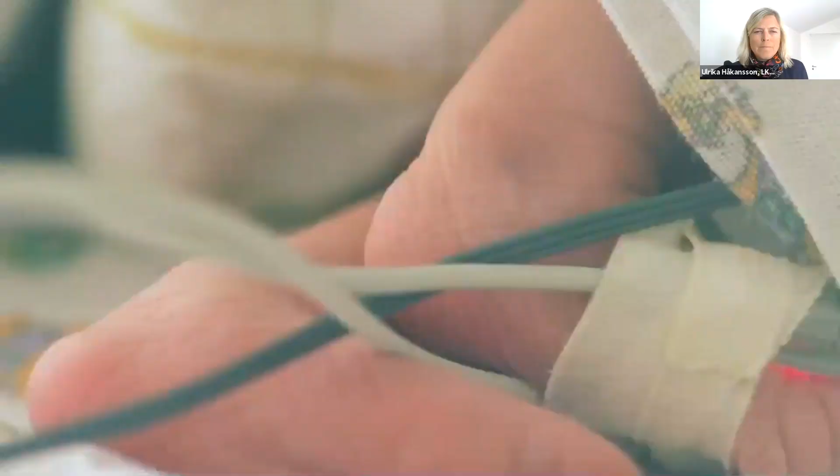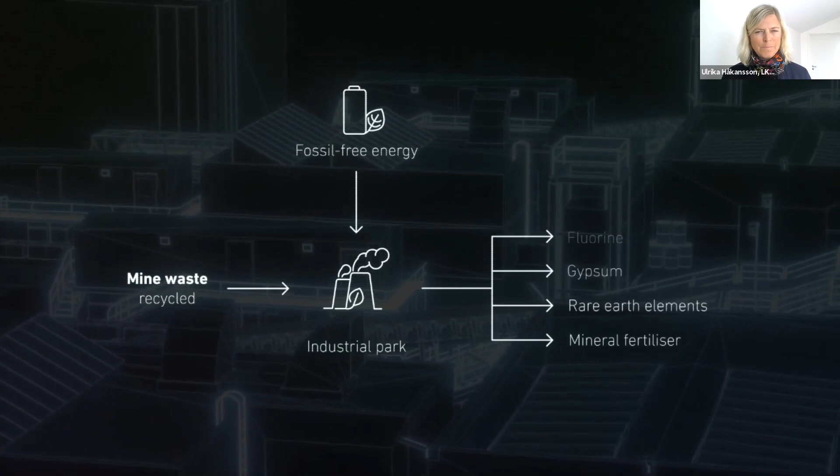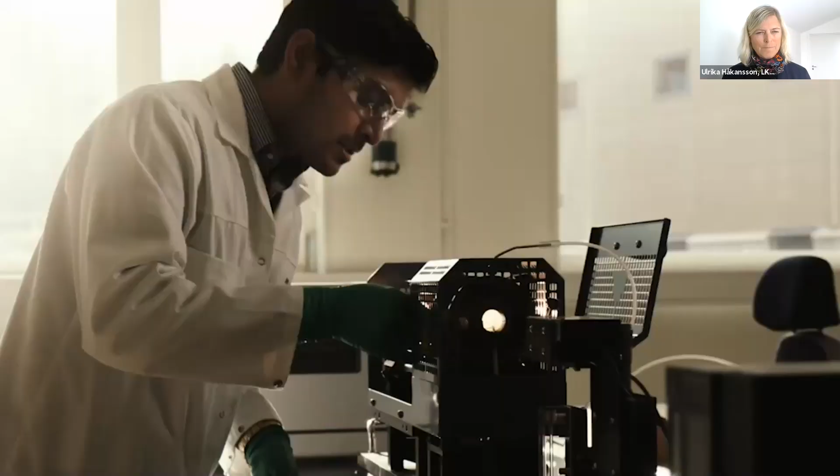In our everyday life, minerals are all around us. Some we're hardly even aware of, like fluorine in small medical applications, or neodymium in magnets for electrical vehicles or wind turbines. With a growing population, the demand for minerals is higher than ever. At LKAB, we have accepted this challenge. These critical raw materials that we need come from down here. Through new technology in the REMAP project, we aim to prove that mining waste can become an important asset to the world's needs, without emitting unnecessary carbon dioxide. By establishing a large-scale industrial park and using innovative technology, we will extract valuable resources from the tailings sand: rare earth elements, gypsum, fluorine, and perhaps most importantly, phosphorus. Without it, global agricultural production would be halved. All of this will be produced with fossil-free energy, such as hydro and wind energy, something we have in abundance up here in the north of Sweden. We can't single-handedly solve the world's need for critical raw materials, but this will certainly make a very important contribution. LKAB already operates some of the most climate-efficient mines on the planet. But now we're starting yet another ambitious journey to turn today's waste into tomorrow's resources.

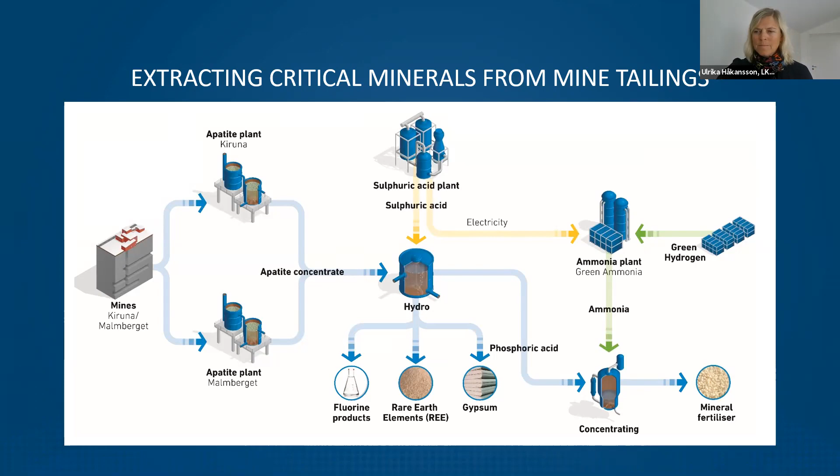We are in a pre-study phase, so we're working a lot with piloting to verify the processes. We have done most of it, and we're going to have our pre-feasibility studies, as we call them, by the end of this year, so we can make a good decision on how to move forward with the basic engineering and taking a board decision. So that's where we are right now.

We have also done a lot of exploration, so we know that we have the phosphorus source with us for the whole lifetime of the project, and LKAB has done a lot of work there. We know that until 2060 we will still have it in our fresh tailings. Apart from that, we have a source in our tailing dams, but in this project we haven't taken care of the tailings dams yet. That's to come in the next phase, when we hopefully succeed with implementing this project. So we do have a large source with us in LKAB.

Our main focus, of course, is on process development for the hydro plant. That's where we make the difference from the state of the art, by extracting all the products and not only the fertilizer.

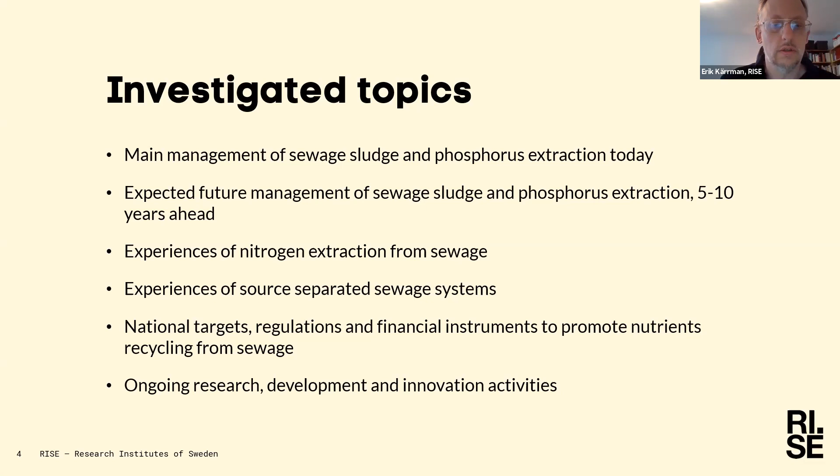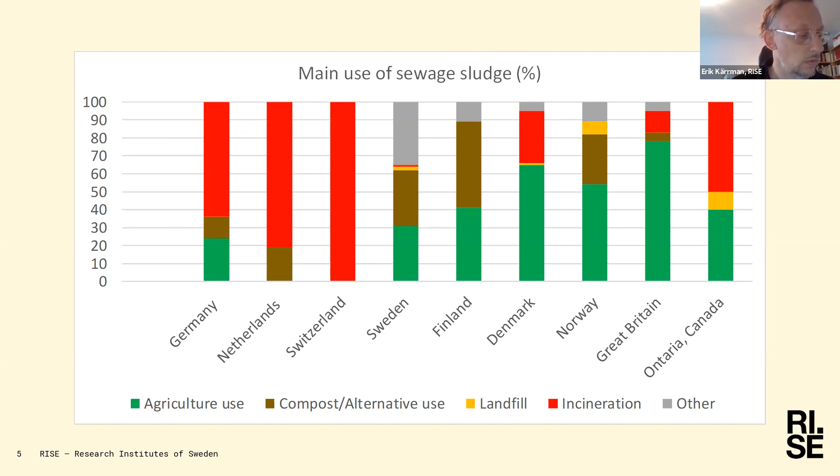What we did was try to categorize these countries a little bit to talk about them in groups. So we called them the legislation category - Germany and Switzerland, the investigation category - Sweden and Finland, and the threshold limit value category, which are the remaining countries.

What was typical for the legislation category was that they have a ban for use of sewage sludge in agriculture - in Switzerland since 2006. In Germany, there are strong regulations since 2018, where they should have a very clean phosphorus recycling plan. There's a limit regarding the size of the treatment plant - from 50,000 and bigger, where we have very strong regulations for this.

So it's very much a domination of incineration here, but they have quite large ambitions and are also starting some activities to recycle phosphorus in these countries from the ashes.

Then we have the investigation category, typically Sweden and Finland, who come from a situation where we have used sewage sludge in other ways. There's a quite large debate, for instance, in Sweden, about how to go further on. We had this inquiry which was actually supposed to suggest legislation to ban sewage sludge on farmland, but they also presented another opinion with other types of recycling of nutrients.

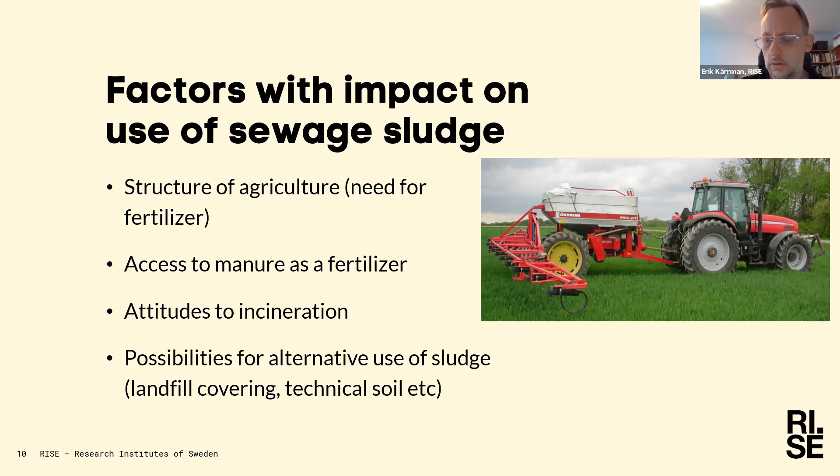We also looked at nutrient extraction in wastewater treatment plants. It's a lot of things going on, but not at a full-scale perspective. There is both struvite production used, applied in different wastewater treatment plants, and also nitrogen recycling, but it's a little bit marginal, I would say.

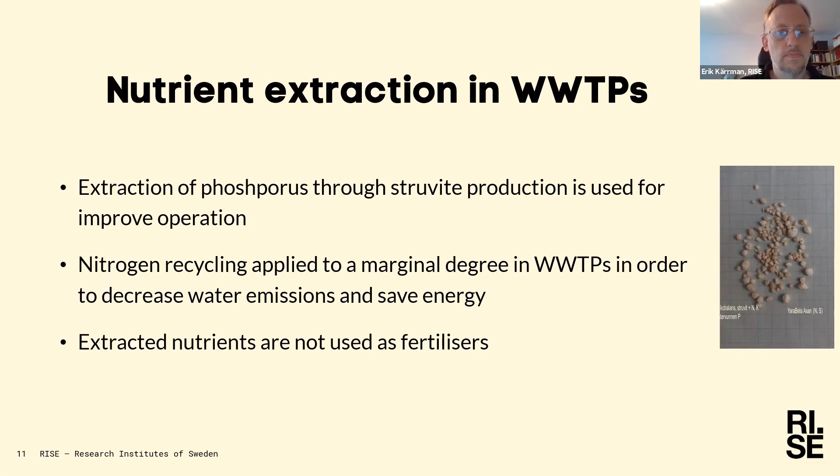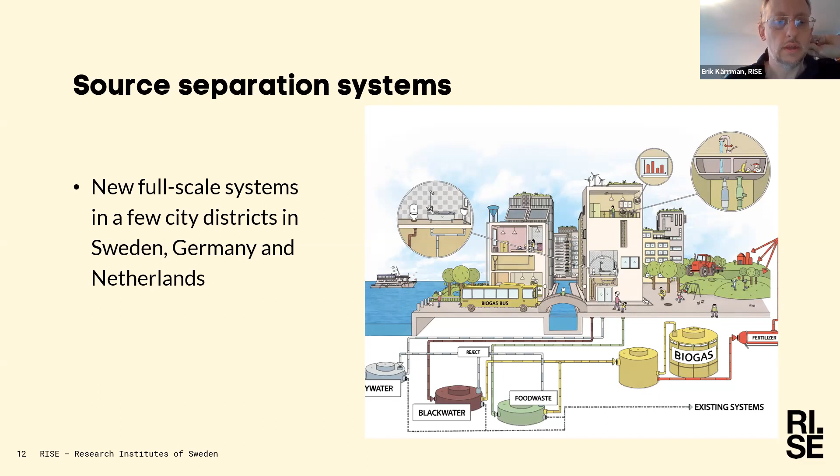We also looked at source separation systems, and it's very interesting to see that in Sweden, Germany, and Netherlands there are quite new built areas - here is an image from Helsingborg, Sweden. We will get a lot of new information about this soon, since these are newly built, which is very interesting. But it's of course a marginal thing looking at the whole of Europe - only districts in a couple of cities.

So what we found in this study, more or less to summarize, was that the movement towards incineration of sewage sludge, with possible extraction of phosphorus and possible use in agriculture, is something that is growing in parts of Europe. But at the same time, we have a more or less unchanged use of sewage sludge in other parts of Europe, and they seem not interested in changing this.

We have a lot of interesting ongoing research, pilot studies, and full scales in different ways of recycling nutrients, source separation systems as well, which will be interesting to see the outcome of. But we also see that there's a lack of business models for the circulation of nutrients from sewage to agriculture, so there is a lot of work needed there if we would like a cycle.

I think I will stop there. Thank you very much.

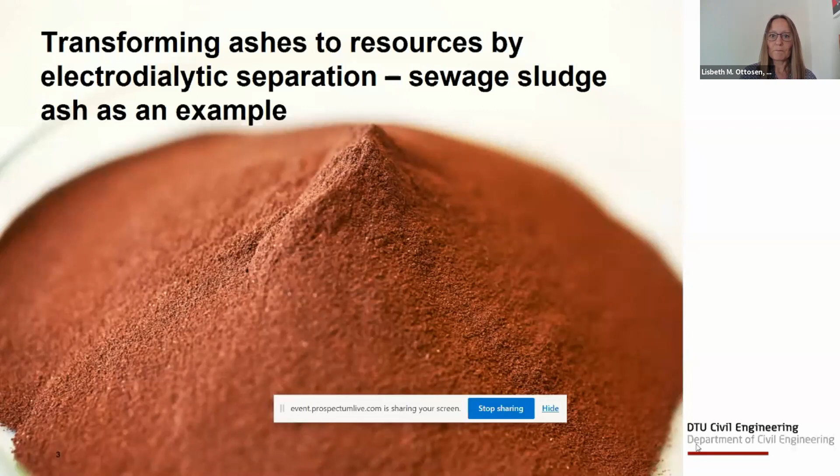And here it is, sewage sludge ash as an example. The overall idea is that we take the sewage sludge, and as we just heard in the previous presentation, we incinerate quite a lot of it in Denmark, and in some countries, all of it. In other countries, like Sweden, none of it, but it might come, you never know.

And we get energy out of incinerating it. We have two very modern plants in Denmark where they actually gain energy even from incinerating such wet products. And then they also get the sewage sludge ash out of it, and it is what you see here, the red powder, that is sewage sludge ash.

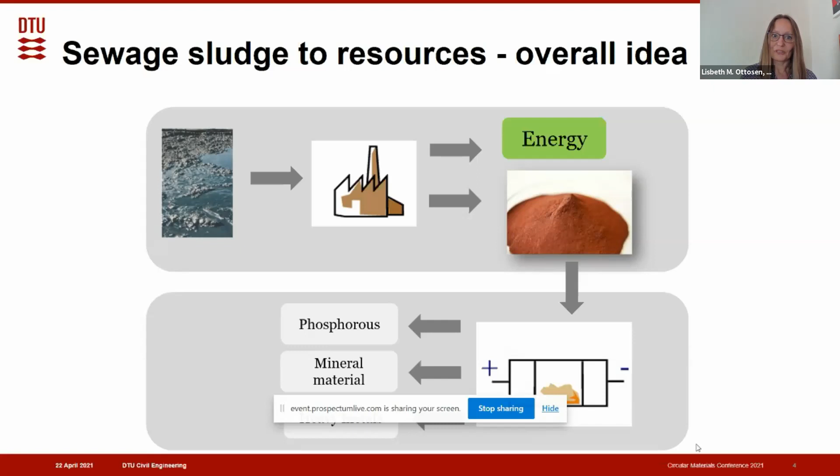Today it is mono-deposited or sent elsewhere, or there are other plans for it, but it is right now just not being really recovered. So what we suggest is that we take a look at this. There is a lot of phosphorus in it. There is a mineral material, which could also be a resource, and then we have heavy metals, which we learned yesterday, for example, copper is a really critical raw material.

So in such sewage sludge ash, as you can see some of the major components here: it's quartz, then we have hematite, that's why it has this nice red color. Then we have whitlockite, which is a phosphorus product, and there's also some calcium carbonates.

Below here, you can see I put some concentrations. It is in these ashes that I've been working with and show you results from. We have quite high phosphorus concentration - you can see up to 10% can actually be phosphorus in these ashes. So we are talking about grams per kilogram here.

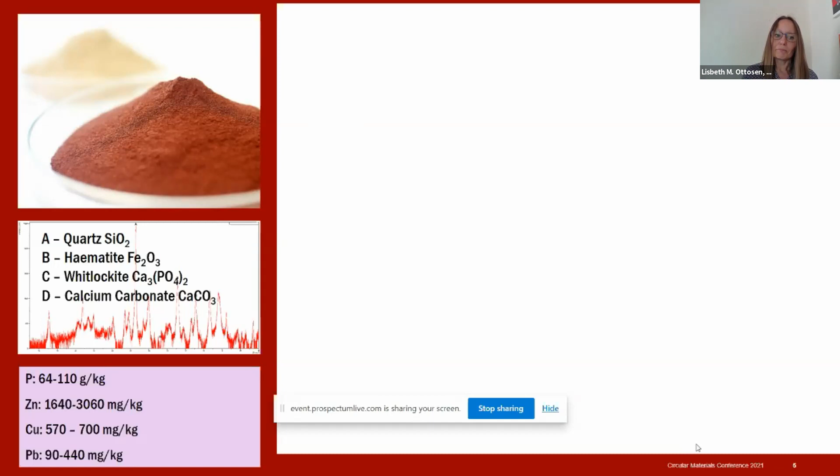And then I also listed three heavy metals: zinc, copper, and lead. You should notice here that these are in milligrams per kilogram, so there's really a scale difference in the concentrations between these two. But with this high concentration, we could, or we should, possibly mine the phosphorus out of this sewage sludge ash.

You can extract the phosphorus in acid. That is what I show here. I've had different concentrations of acids, getting higher and higher concentration, lower and lower pH to the left here.

And then I have shown here how much I've solubilized of these elements: phosphorus in black, and then copper, zinc, and lead. As you can see, if you go low enough in pH, here it was about 1, then you have almost all phosphorus extracted.

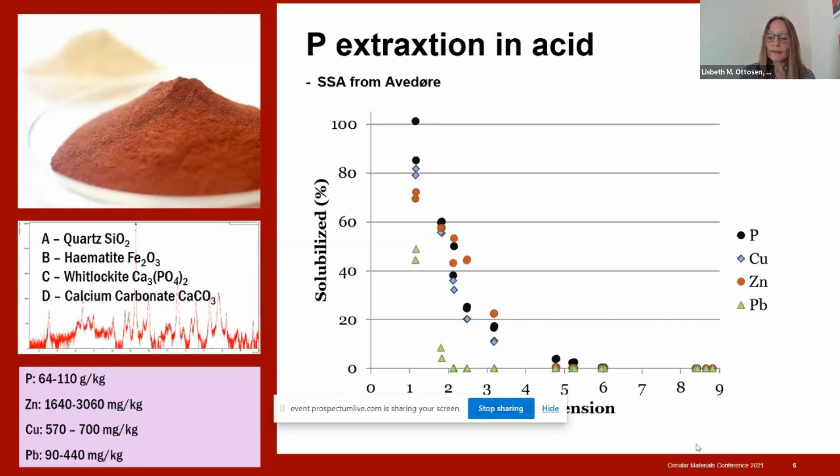But what you also see is that you will also extract the copper, zinc, and lead at the same time, at the same pH. It's unavoidable if you do it like this acid extraction, and therefore you need a separation step afterwards. What we suggest instead is to do it simultaneously.

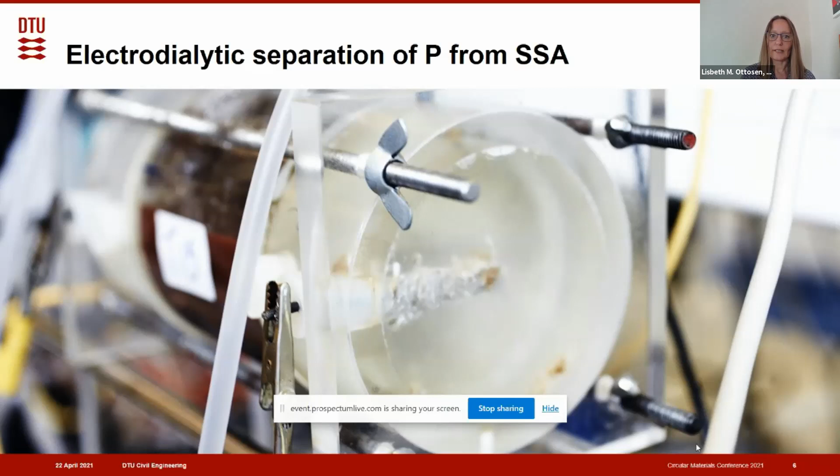You can do that, simultaneous extraction and separation, if you apply an electric field, using an electrodialytic method, like I'm going to show you here. Not that many details - you're much welcome to ask me about details later, but due to this short time, you just get the fast version.

You must imagine here in this compartment, I have two compartments, as you see. In this compartment here, I suspend the sewage sludge ash in water.

Then I have another compartment here. I place the cathode in the other compartment, that is the negative electrode, and over here it's a positive electrode, the anode, that is placed.

And then I have something here which is called a cation exchange membrane, and it's a membrane that only allows positive ions to pass. And when I then apply my electric field here, from the electrode process at the anode, I will have acidification. So that means that my acid is produced by electricity directly into the suspension.

While it's acidifying, we will have a release of heavy metals, which are in the electric field transported into the cathode compartment. And then the phosphorus, as it is negatively charged or in uncharged complexes, it will stay in solution here in the suspension of the ash. So this is the separation. We have the phosphorus here in the suspension, in the liquid phase, and then we get the heavy metals out here.

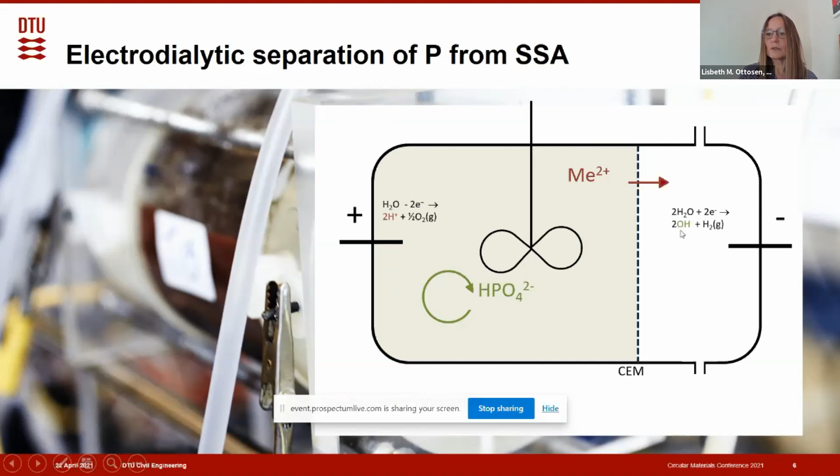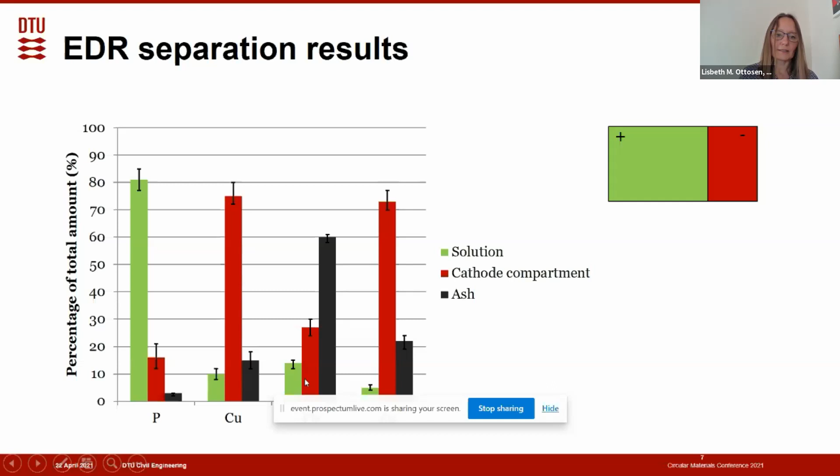What you should also remember was that I talked about grams per kilogram for phosphorus and milligrams per kilogram for heavy metals. So it's not like we have almost as much - it's not that 10% of the weight of the phosphorus was the same as we had, for example, for lead and the heavy metals. There's much less heavy metals than we had phosphorus in this suspension.

So let's now take a look at the different things that we have separated the sewage sludge ash into. And first we can look at the suspension where we have the phosphorus.

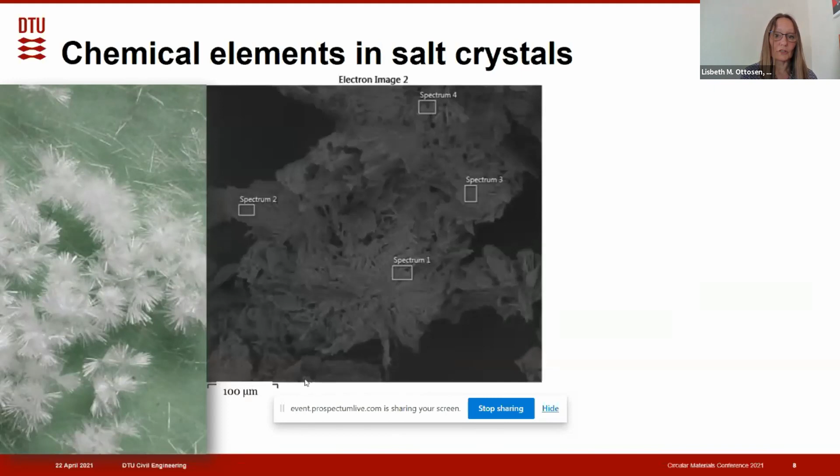So these crystals were, you could say, the product. This is the concentrate of what we could get, the most concentrated fraction we could get out of this solution. And we went to the SEM to see what's actually there and took some spot analysis.

And most of it is like we wished for. It's phosphorus, there's a little aluminum, there's a little of iron, and then there's also calcium in it. So it is a mixture of calcium phosphate and phosphoric acid that we have here. And these are very good products to continue with in the industry.

Calcium phosphates are soluble, so you can easily get your phosphorus out. Maybe it's not the right way to concentrate your phosphorus to evaporate the water, but this is a way you can do it.

And then, as I said, I wanted to know what is the cadmium concentration related to the phosphorus concentration. And as you can see here, it's really low - it was 3.7 milligrams of cadmium per kilogram of phosphorus in these crystals here. And it is very low compared to commercial fertilizers.

For example, in Europe these have an average of 138 milligrams per kilogram of phosphorus. And the concentration we obtained was actually at the very low end - I think maybe it was at the lowest end of what I could find in literature on commercial fertilizer. So it is a very clean product that we have produced here, a clean phosphorus product.

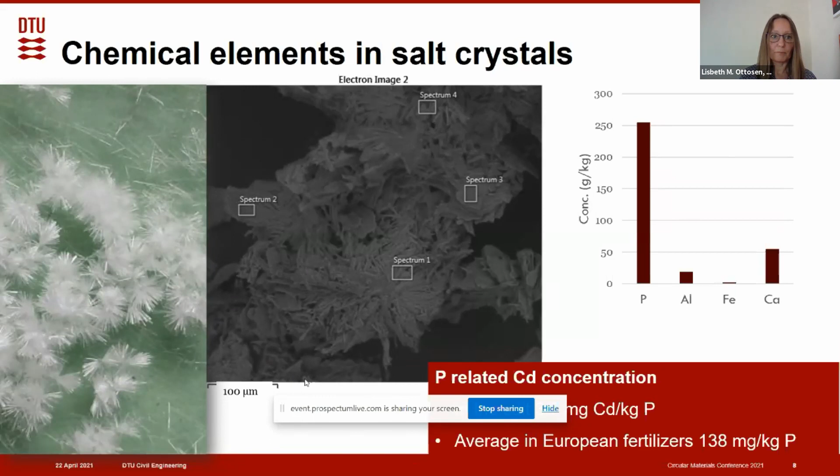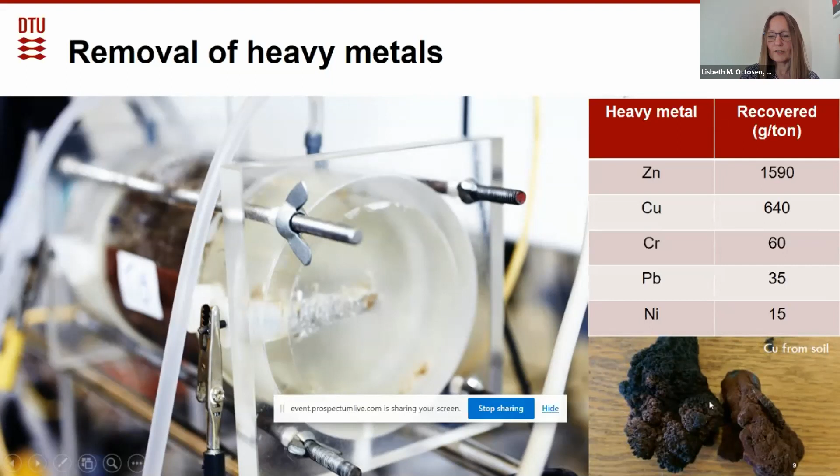And if you're very smart and bright, you can actually use this electroprecipitation to get products like this - this is pure copper, 98% pure. It is not extracted from ashes, I should admit immediately, that's why I put it here - it's something I've actually extracted from polluted soil. But this is the idea, this is what we'd like very much to do with the heavy metals: have them as pure resources which can be used directly in industry again. We're not there yet for the ashes or sewage sludge ashes, but it can be done, as shown here by examples from polluted soil. There's almost half a kilo of copper here, so it's not just a small sample.

But we still have something left - we still actually have an ash. It's still very red because iron oxides are not very soluble in acids. About 50% of the mass is left after I've extracted the phosphorus and the heavy metals, as you saw. So we asked ourselves - and as I said in the beginning, I'm from the Department of Civil Engineering - that was a question we could answer ourselves.

Could this actually be a possible resource in construction materials? Therefore we tried to cast - I had a PhD student working on this - we tried to cast concrete with this ash as a cement replacement. That's a good story, because cement production gives very high CO2 emissions - actually 5 to 8% of the anthropogenic release of CO2 to the atmosphere is due to cement production. So can we reduce this by using other things like sewage sludge ash? We're really on the good environmental side.

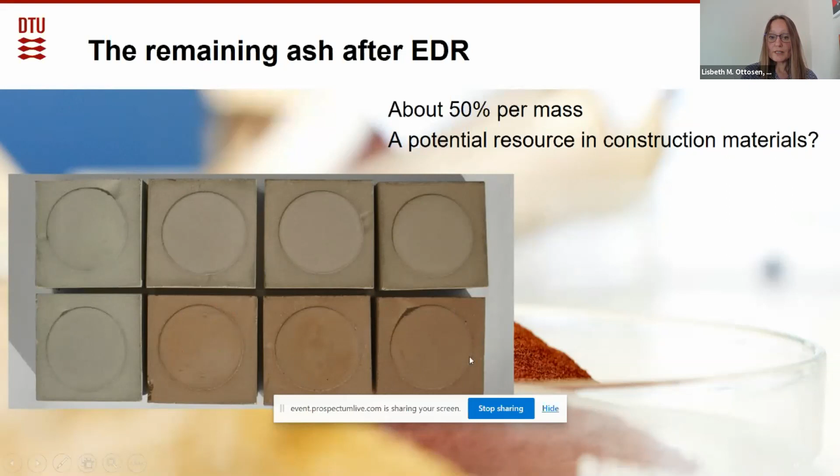What I show here is concrete without any type of ash - normal plain concrete. Then when I mix in my sewage sludge ash, which is treated, I get nice colors on the lower row. If it's not treated, you get the colors up here - it cannot be used directly, it needs to be milled, processed in some way. But when it's milled, you get a nice color, and you can actually replace 20% of the cement without losing strength of the concrete. So this could be a very good solution for this treated ash.

It could also be used in bricks. Here in Denmark, we have a lot of brick houses - we like very much to live in red houses. I do not, I live in a yellow house, but most people will like the red houses. Actually, the clay you incinerate to fire and get red bricks is a scarce resource - you get yellow bricks in the brickworks right now. But if you mix in a bit - here 30% of the clay is replaced with sewage sludge ash - you get a nice red color again, and it also had good qualities, these brick pellets I made here. So that could also be a use for the mineral fraction after extraction of the elemental resources.

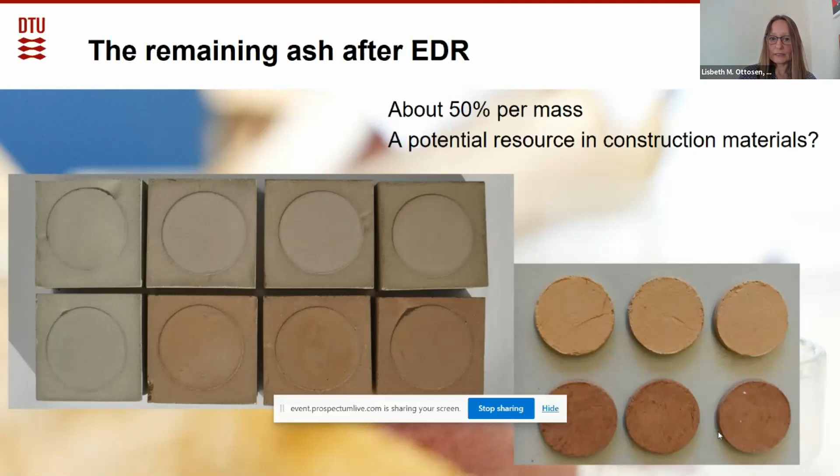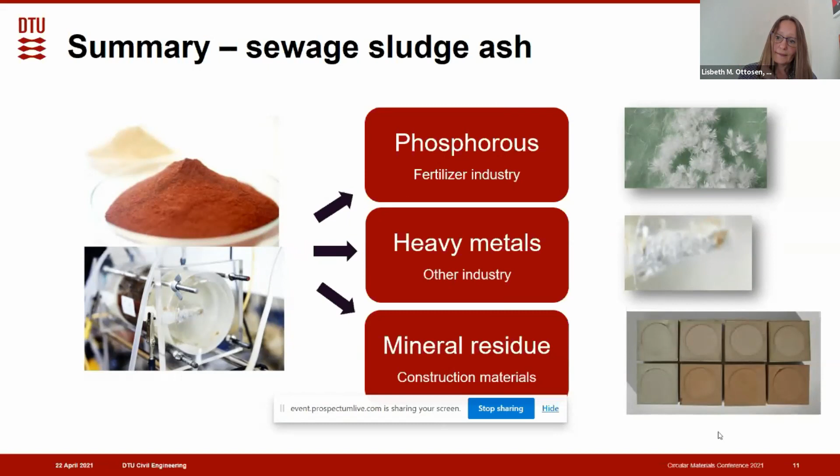And then the mineral residue could go to the construction materials, and then there's very little left which is not recirculated. The little which is left could be mercury and cadmium, for example, which we simply need to get out. But it would also be a very high benefit to get these out of the cycles and deposit it in the most safe way. So all resources that could be used are used by this process.

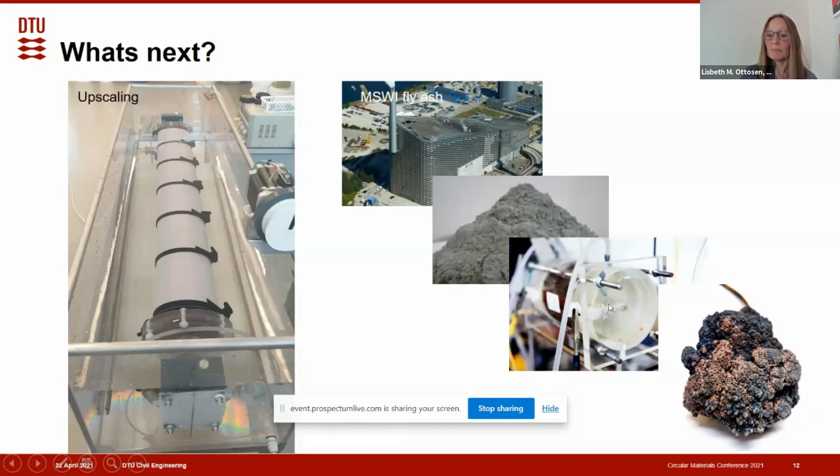So this was all from me. Thank you very much for your attention, and sorry for the troubles in the beginning of my presentation. If you have any questions, just send me an email.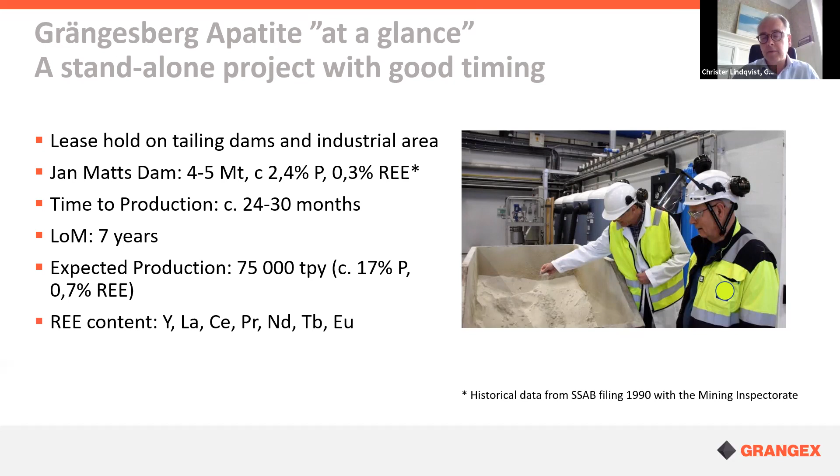But anyway, we are located in Grängesberg, as I mentioned, focusing on the Jan Matts dam southwest of the village of Grängesberg. Grängesberg is more familiar to you all, I guess, due to the Spendrups beer, and that's fine, it's tasty and good. But we are focusing on the tailings here.

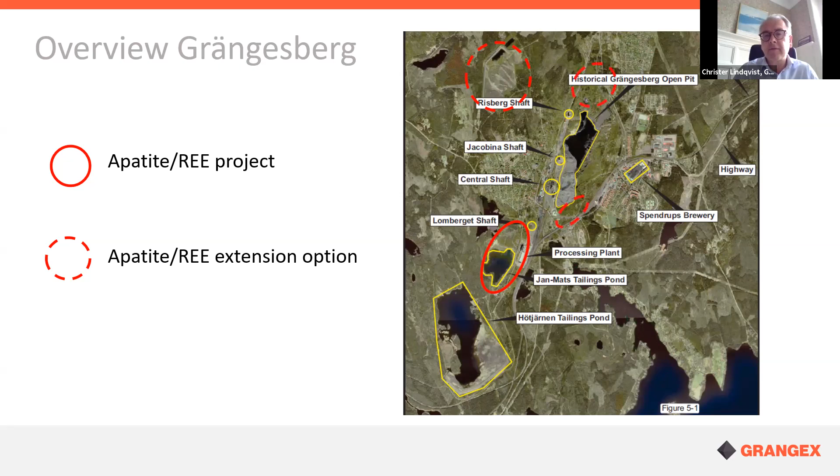And this is the site we are starting with. We have also expansion opportunities once we have exhausted the extraction from the Jan Matts dam. And there are three more sites around the Grängesberg village.

The dam as such has been in operation from the 1950s up to 1973, when it was closed. Thereafter, Grängesberg Iron Mine Company started to extract the apatite as a byproduct from the iron ore making at the time, all the way up to 1989. So this is the last big dam with phosphorus in it, but it's enough to start with.

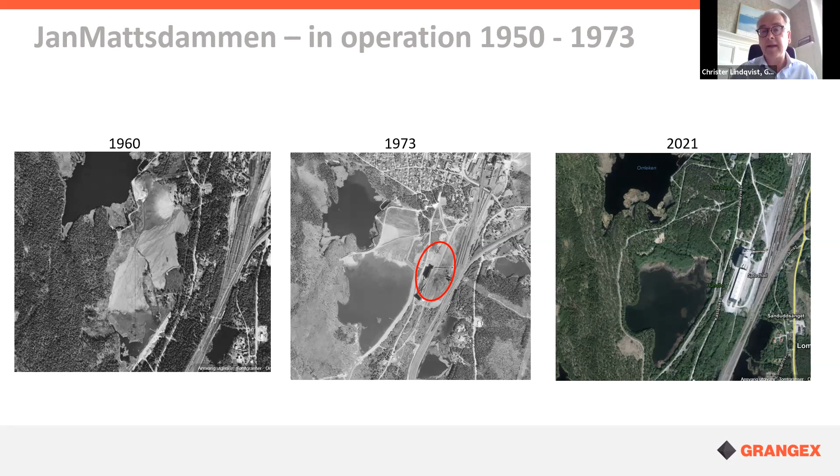At the same time, LKAB was sold to the state, the last 50%, in the late 50s, and the money was used for various investments, also to build a new industrial plant very close to this dam. This is how it looks today, and we have the industrial plant or area still there, which is very fortunate for us.

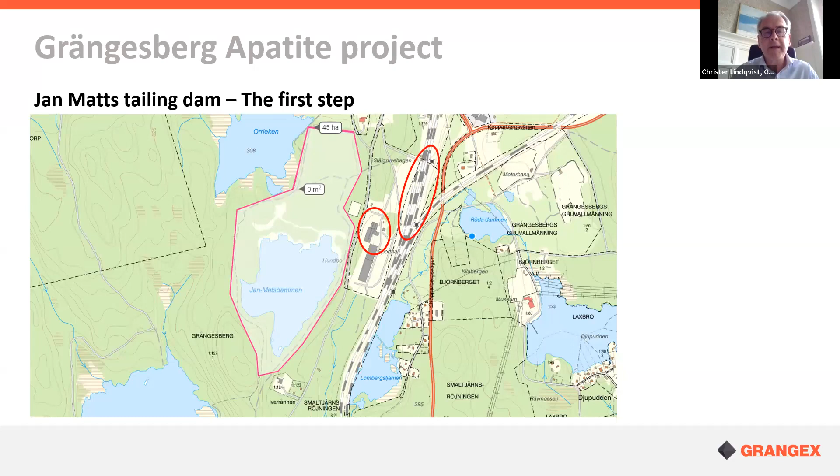So we have the plant there, and the tailing dam just adjacent to that, and the marshalling yard just on the doorstep. So we have the internal logistics very easy. We can get to the tailings very easily, and we can also produce a sellable, exportable product and send it out by rail down to the harbors, Oxelösund or Köping. So this is very fortunate and good for this project.

There is a process plant there where we will fit the hydrometallurgy process, a flotation plant for extraction of the apatite.

But going forward about what we are doing right now, we are in a silent period, unfortunately, so I can't actually give you an update on where we are in our process tests, but we are moving at high speed. We are developing a process layout, or flow sheet, which is very interesting and uses the latest technologies. We are conducting the process testing at GTK in Finland, in Outokumpu, but I can't give you the results because they have not been published. I'm sorry about that.

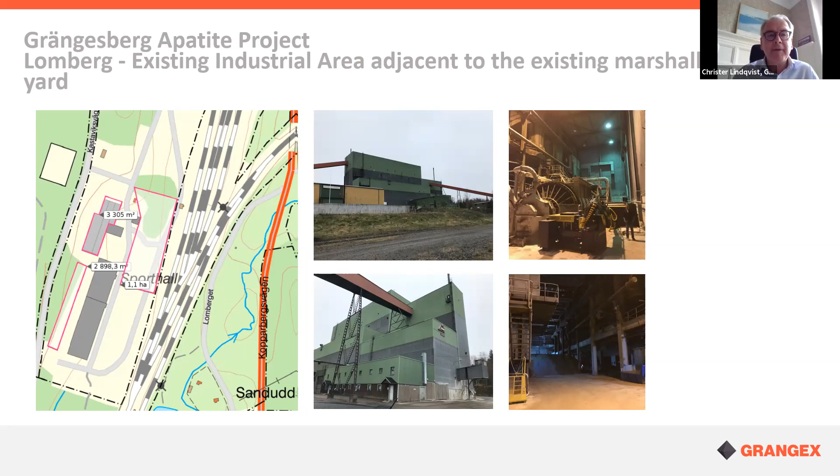But anyway, we know from the apatite process that it has been known earlier that there are at least two other rare earth minerals in the tailings. And this is significant due to the price increase we have seen lately on rare earth, as well as the expected price increase of phosphorus from customers, or fertilizer producers.

It is very interesting to start to extract or separate at least these kinds of other minerals, like monazite and allanite predominantly. What we see, what I can say, is that we can produce a phosphorus mineral or apatite with very high phosphorus content.

There is no cadmium in it, and we are low on arsenic. But the risk we have, and I come back to that, is the permitting process. That's the risk that we have larger delays than we should have. So that's where we are.

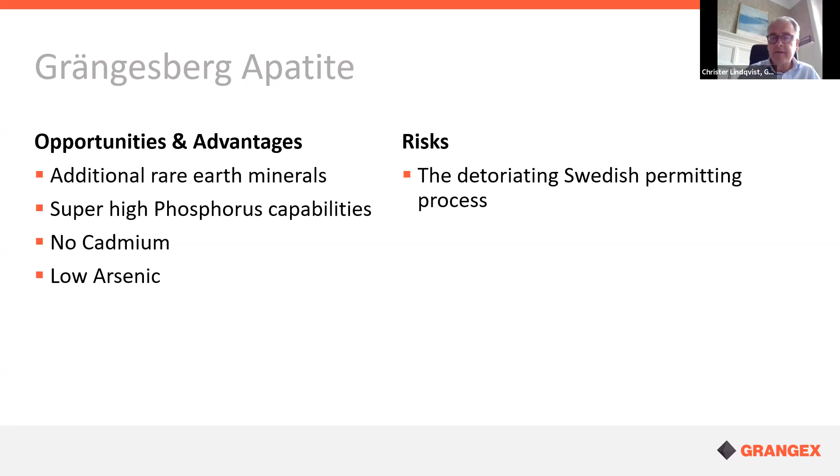But with the rare earth minerals and the additional contribution we can get from there, we also contribute to the European self-sustainability of the rare earths—at least a part, not as much as LKAB will be doing later on, but at least a part, and we will probably be on stream earlier than LKAB with their processes. So in order to contribute to our maintained lifestyle and reduce the dependence on China, Grängesberg is part of this strive to

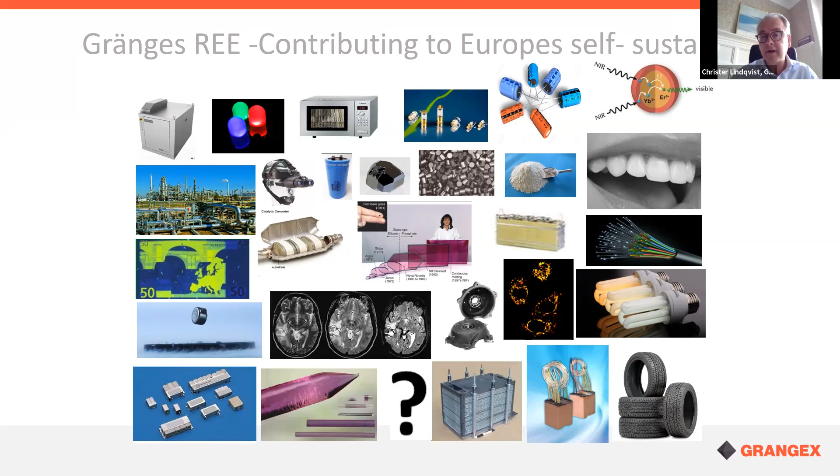supply critical metals and minerals for Europe. So with that, I think I'll stop and say thank you.

Thank you so much, Christer. That was very interesting to hear, although it felt a little bit like a teaser. So we're going to have to look for upcoming publications, right? Yes, that's right. Absolutely. Perfect.

We will give product updates, which we will publish also. And I hope I can come back later and be more specific on processes, designs, and things like that. I think it might be very interesting in this forum, at least. Excellent, thank you very much.

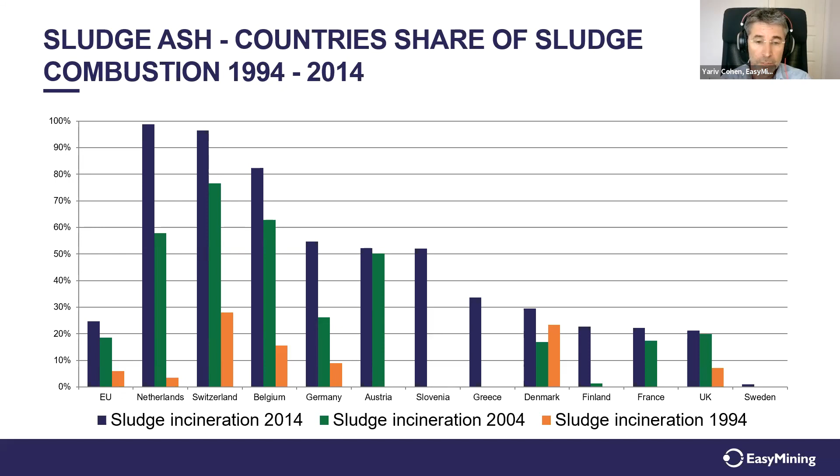But the general trend is an increase in incineration of sewage sludge due to several reasons. And as Erik also mentioned, some countries have already taken a political decision that phosphorus recovery will be mandatory. It's Germany and Switzerland in the lead, which actually opened the market for recycling phosphorus mainly from ash of incinerated sewage sludge, from these countries where the sludge is being incinerated to a high extent.

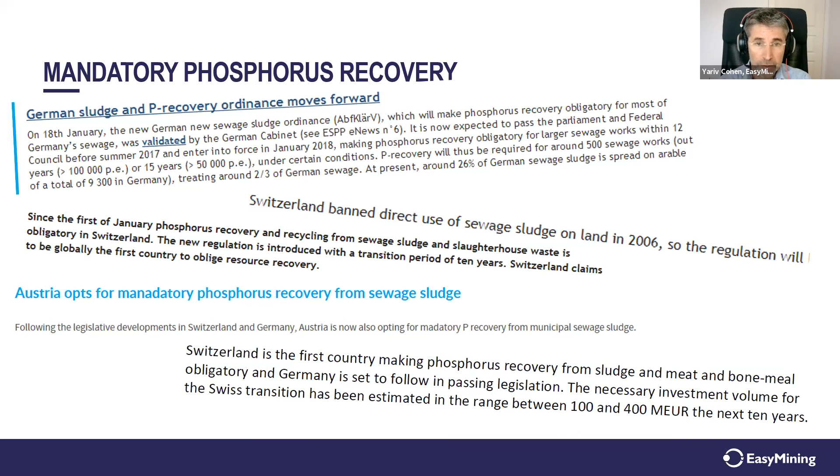The ash-to-phos process is similar to processing rock phosphate. It's a wet process in which we use acid to treat the ash to dissolve the phosphorus, and as Lisbeth showed, you also dissolve all the metals in the ash with acid. With this process, we use acid and lime as main input chemicals, and we can process the ash, recover the phosphorus in a clean form, and separate the heavy metals for disposal.

We can also recycle the iron and aluminium separately in a commercial form for reuse as coagulants in wastewater treatment plants. And then we have a residue from the leaching which, as Lisbeth showed, can find potential in the cement and concrete industries.

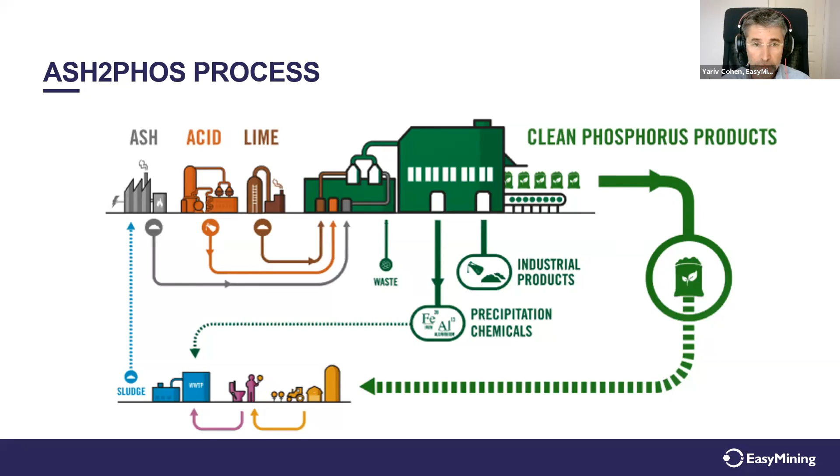A main feature of the ash-to-phos process is detoxification. Here I show the degree of reduction in heavy metals. If we look at the heavy metal content in the initial ash versus the recovered product, we see a reduction of over 96%, and for many heavy metals we're at 99%, close to 100% reduction in concentration. So the recovered phosphorus product is very clean - I'd say it's the cleanest raw material available on the market today, independent of the ash composition.

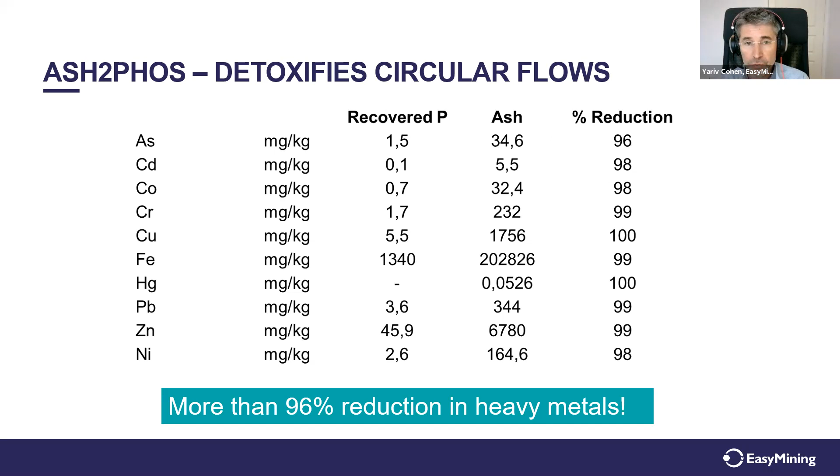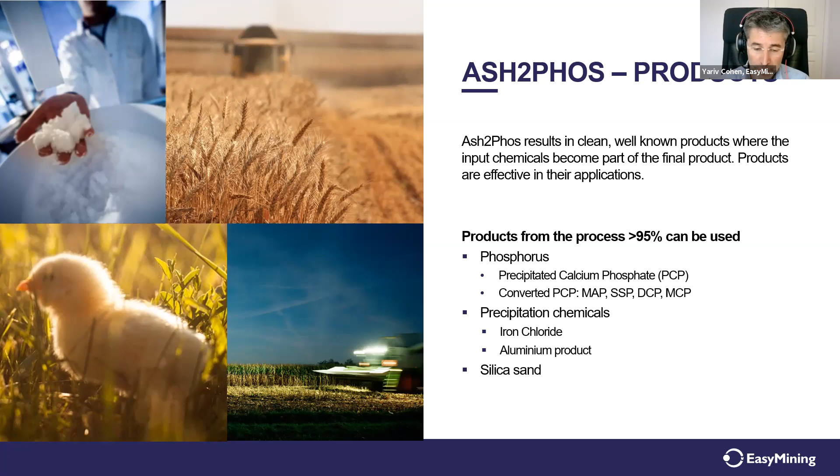From the process we recover phosphorus in the form of precipitated calcium phosphate, which can be used for feed and agricultural application, and can also be converted into any existing fertilizer such as ammonium phosphate or superphosphate. In addition, we recover iron as ferric chloride for wastewater treatment, and we have several possibilities for recovering aluminium as aluminium hydroxide, sodium aluminate, or A4 zeolite. The residue, silica sand, can find application in the cement and concrete industries.

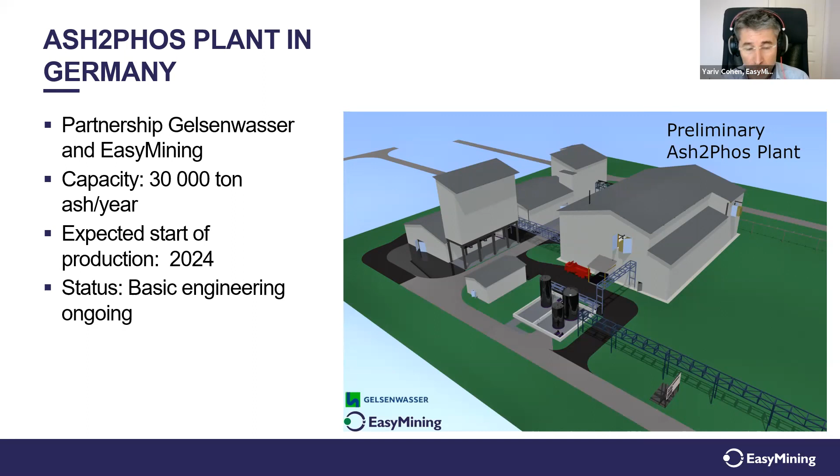We also have a project in Sweden, in Helsingborg, at the Kemira site. You can see there's an existing building - historically quite interesting, since long ago it was a phosphoric acid plant, probably using apatite from Grängesberg. Now we intend to put the ash-to-phos process into this existing building, aiming for a capacity of 30,000 tons of ash per year. Since there is no Swedish ash, we intend to base production on imported ash from outside Sweden. We've finished the basic engineering for this plant, submitted the permit application, and received funding from the Swedish EPA.

The expected start time here is also 2024 to 2025.

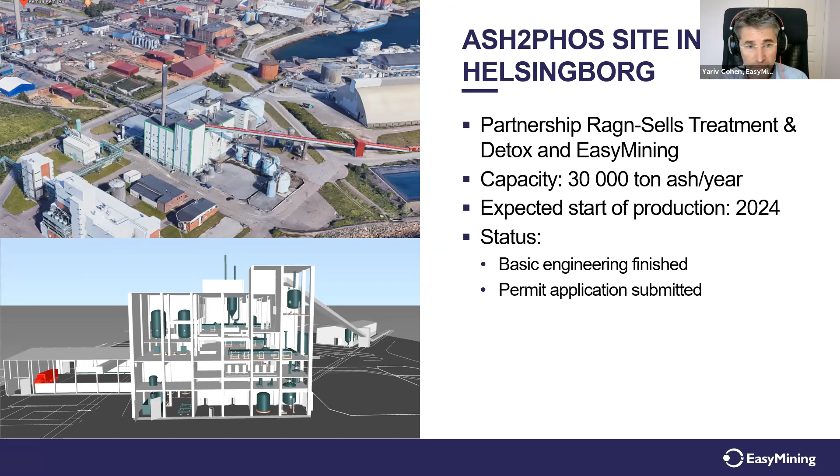Now I'll talk a little about potassium. This relates to our ash-to-salt technology, which treats fly ash from waste incinerators. Fly ash is a waste product that comes from flue gas treatment when incinerating waste. The main problem with fly ash is its very high salt content - on average in Sweden about 20% of the weight is soluble salts, which makes it very costly and difficult to dispose of. It's a hazardous waste.

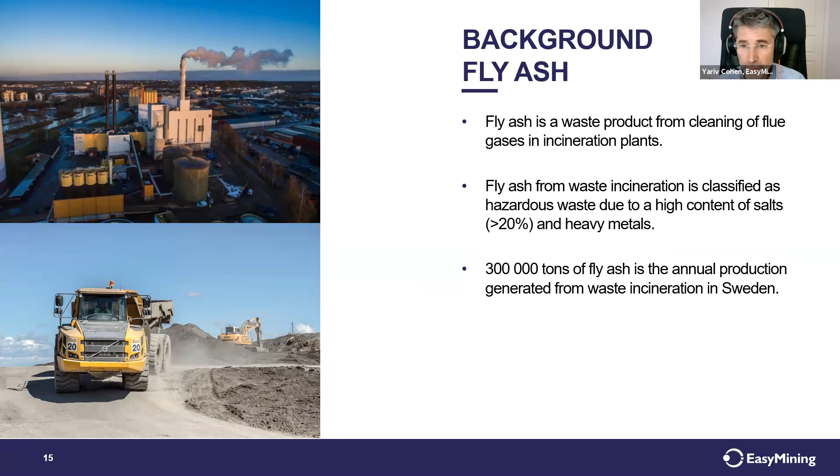In Sweden we have around 300,000 tons of fly ash per year, and Ragn-Sells handles about 50% of this market. For that we've developed the ash-to-salt process, which involves washing the fly ash with water, dissolving all the salts. We get some heavy metals, and we have a heavy metal cleaning step where we separate them out. This is a zero liquid discharge process - we crystallize the salts and recover three: potassium chloride, calcium chloride, and sodium chloride.

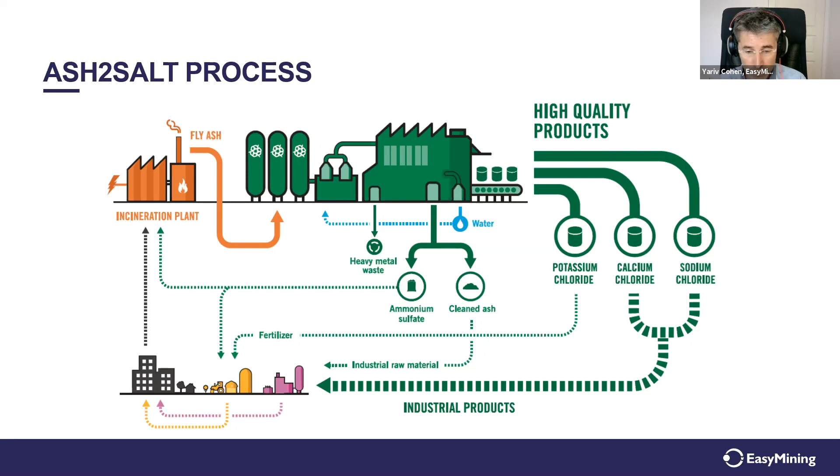In flue gas treatment, incinerators add ammonia to reduce NOx, so there's also ammonia in the ash, which we recover as ammonium sulfate. This enables the residue to either be disposed of in a non-hazardous landfill or recycled in the cement and concrete industries. We are now building the first plant - I think it's the biggest investment in circular economy in Sweden so far.

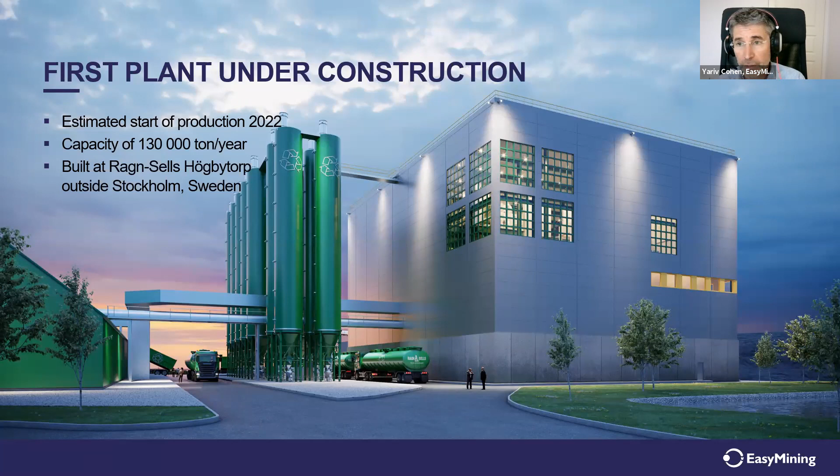Production is intended next year. The capacity of this plant will be 130,000 tons of fly ash per year. The ash will come from 15 incinerators and also via conveyor from the nearby E.ON waste incinerator.

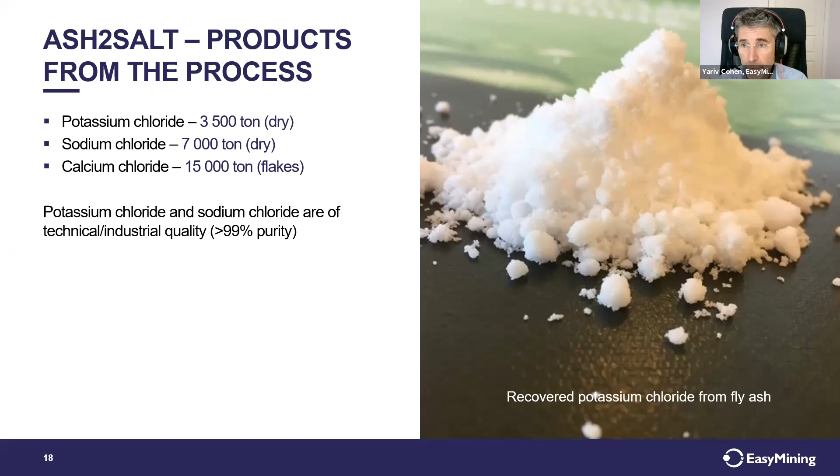The products from the plant will be potassium chloride that can be used for fertilizers or chemical industries, sodium chloride, and calcium chloride. All the products will come as solids with very high purity. In the picture you see the potassium chloride, and here you can see that there is very low heavy metal content.

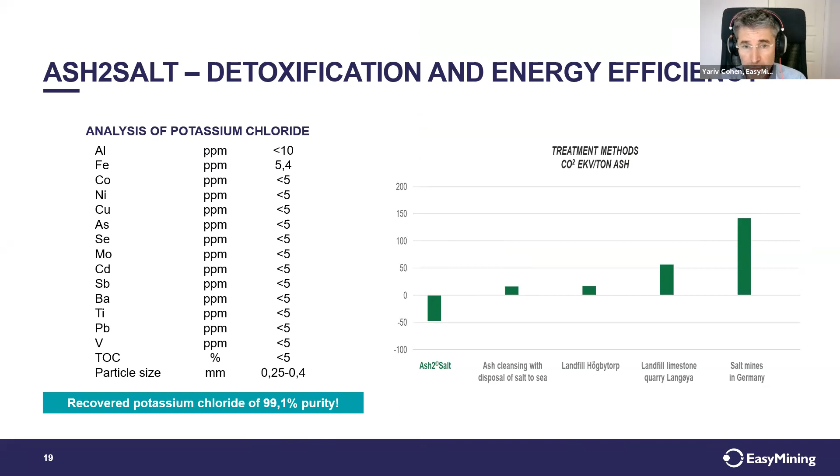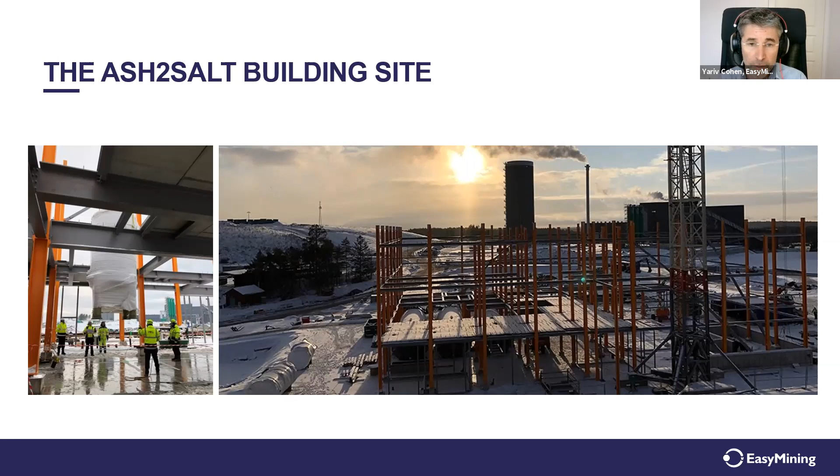It's a very, very high quality product, and the LCA shows also that the method is very favorable. Here I can just show you some pictures from the building site. I think these pictures are from several months ago, but you can see that work is ongoing on construction of the plant, and we expect the start of operation next year.

And then I will go over to the last topic, talking a little bit about the recovering of nitrogen from wastewater. This is our newest technology.

Why is it important to recover nitrogen? The reason is that today nitrogen fertilizers are based on using natural gas to produce ammonia. In the future, as LKAB showed, this can be changed, but today it is based on fossil fuel. And then when the nitrogen ends up in the wastewater, it is treated with a biological treatment which destroys the ammonia and releases it as N2.

We would like, instead of using a biological treatment, to use a chemical treatment and not destroy the nitrogen, but recover it. By doing that we can save a lot of greenhouse gases, energy, and costs.

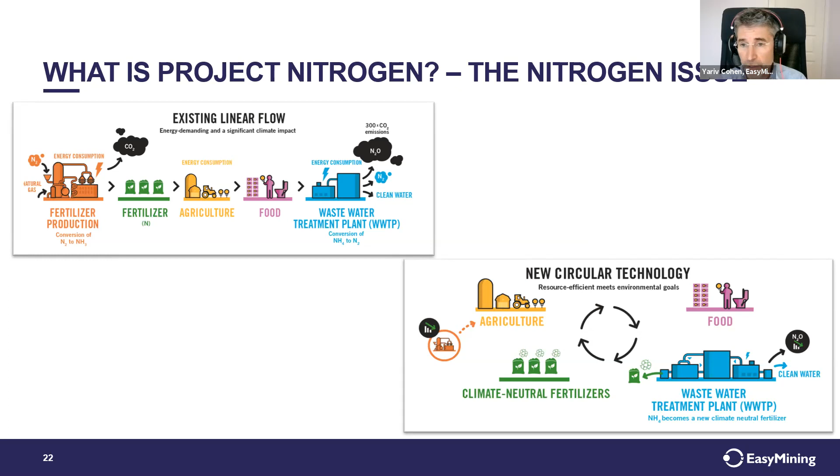The advantage of this process is that it's a chemical process. It is not sensitive to temperature, salinity, and so on. It has fast kinetics. You don't need to have large basins and so on. It is based on a chemical reaction.

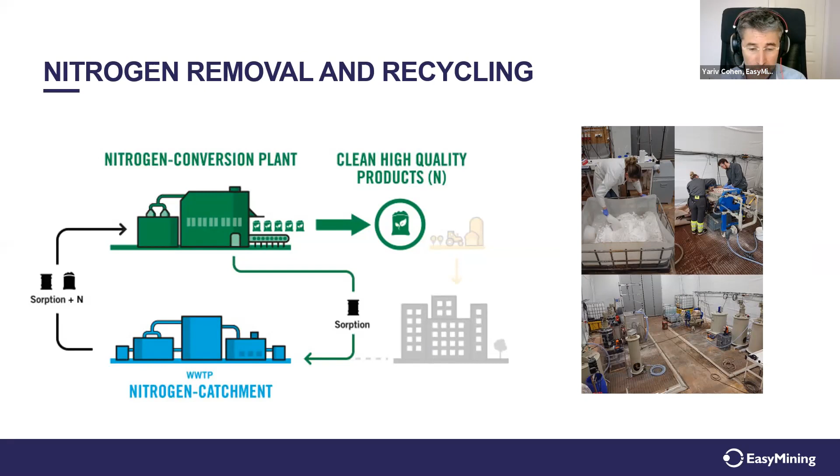This project is an EU Life project with a budget of 3.6 million euro. We have several partners here: Ragn-Sells, Biofos, and Lantmännen.

In this project we will build a mobile container that will treat both landfill leachate and also will be moved to Biofos in Copenhagen to treat reject water from wastewater.

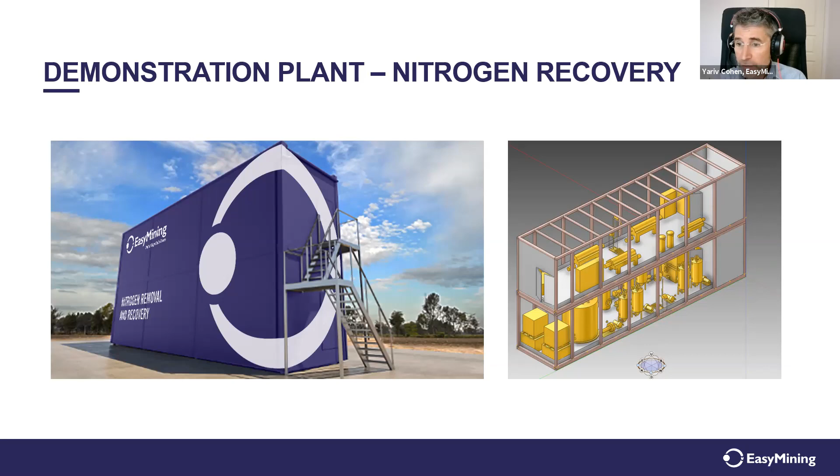I think this is my last slide. I hope I managed to do it in the correct time. So thank you very much.

Great, thank you. So interesting that these plants, these new plants are now being built around the world. So a lot of things to look forward to and follow.